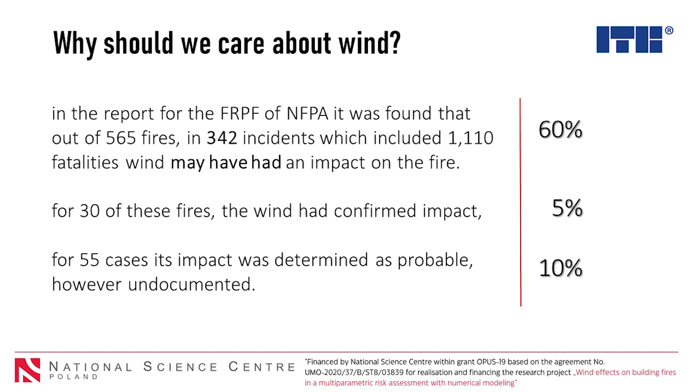So I see it as an important phenomenon, and I find a lot of joy in studying it. When you think about building fires, wind can interact with the building on its envelope, especially at the inlets and outlets - the points where the building meets the environment, the atmosphere. This is where wind can act as a source of force through pressures.

It can create very difficult to predict pressure patterns around the building. It can create pressure gradients between walls or roofs of the building. It can cause a very strong updraft force on the roof, meaning the wind is sucking the roof up with a force of even hundreds or thousands of pascals.

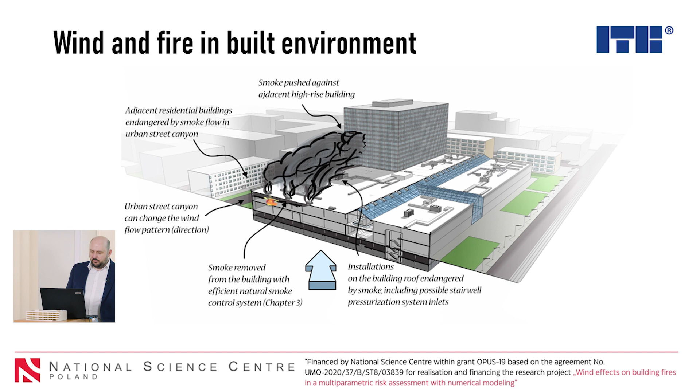Inspired by this plot, I tried to make one for fire following a similar fashion, and I put the phenomena that I find relevant to fires in here, placing building fires in the middle of the graph - scales from 1 to hundreds of meters, time from minutes to perhaps dozens of hours.

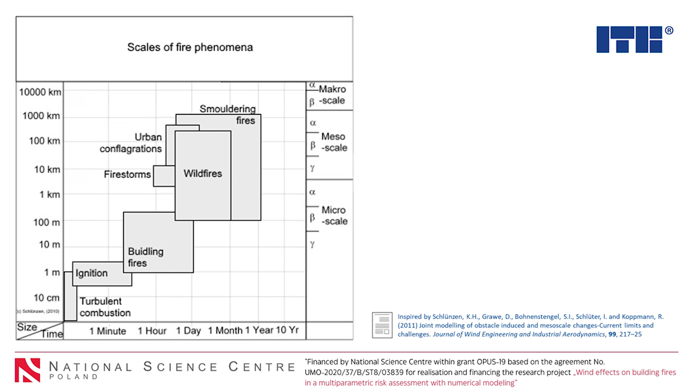This is the physical and time scales that we operate when working with fires in the built environment. This is pretty much the area where we operate as fire safety engineers. We don't go below, we don't really go above.

Of course, we do include some phenomena like turbulent combustion or ignition in our engineering assessment, but not through direct explicit modeling, but rather introduction of submodels and routines that help us introduce those conditions into the analysis we perform. The same happens for larger phenomena, the atmospheric boundary layer.

Stuff that in terms of wind happens at the scale of kilometers in the upper parts of the atmosphere impacts the bottom layer where the buildings are. We don't model that directly. It's pointless to model that directly in our CFDs. We have to find models that will allow us to put that in.

So here you can see a first challenge that emerges when one tries to merge wind engineering and fire science: they simply act at different scales. You have to find the place where those scales are the same, in which you carry your analysis. And for everything happening at a different scale, you have to figure out how to model that to get a reasonable outcome.

And boy, that was a significant part of this project, which you will hear about in the next presentations. So now let's try to summarize where we are. I will say we are capable of modeling wind, we are capable of modeling fire. That perhaps is a bit far a statement, and I guess many scientists would disagree that we are capable of modeling fire, but I think for engineering requirements, fire modeling is something we commonly perform, and it's nothing unexpected to do.

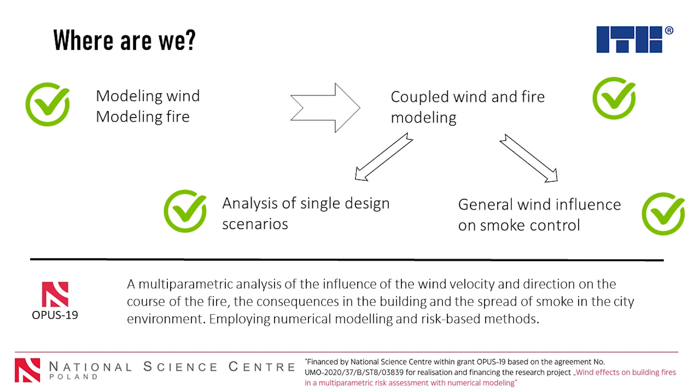Now, if we go a little deeper into that, where the challenge is: fire engineers, we like to simplify fires. We love the fire phases—growth, flashover, decay phase. We love to simplify fires. I often say that fire science is the science of complexity, and simplifying those complexities so we can use them in practice.

But this is simply a description of a fire that has happened, or a fire that may have never happened. It's just a single course of a fire. I like to view it as a more complicated phenomenon, something that begins, ignites, then perhaps spreads, grows. And based on how the course of the fire went, it creates damage or loss. It's not a single line on a plot, it's thousands of possible plots that you could have.

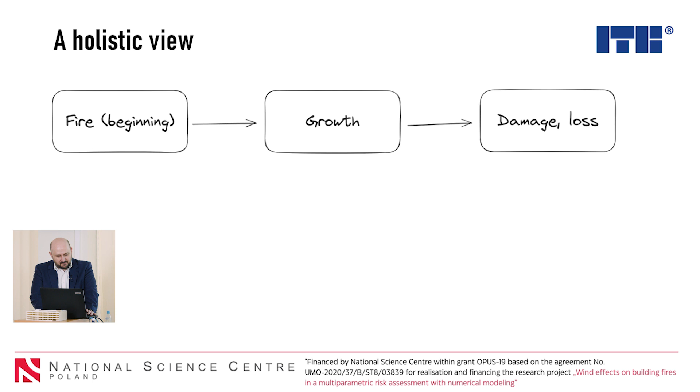Now, if you think about it, you put systems and wind into that equation, you end up with a significantly more complicated picture. Your systems in the building will affect the fire itself, the way it spreads, and how much damage it does. And wind will affect all of those above—it will affect the systems, it will affect the growth, it will also perhaps drive or prevent damage. So even though the graph is simple, it's a complicated mesh of interactions between those things, very nonlinear. But to make it worse, you cannot simply multiply fires by systems by wind.

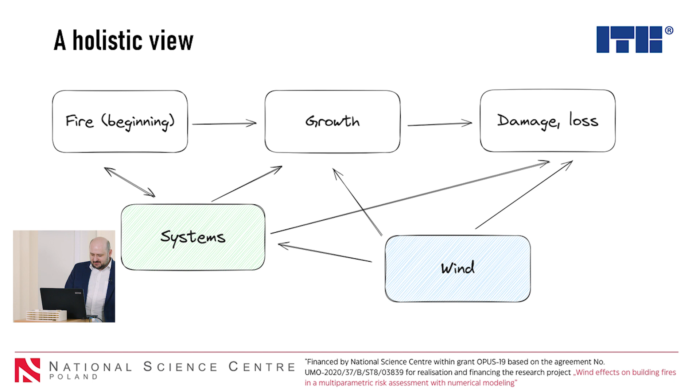These are complicated phenomena. In terms of fires, I like to think about fire as a collection of events that happen one after another. The fire has to ignite, then if it has the capability to spread to other objects, it will. If it doesn't, it will decay. If it has enough ventilation, it will be driven by fuel. If it doesn't have it, it will be driven by oxygen. It's a bunch of events that happen consequently one after another, very difficult to predict when they will happen.

Some people try to present this as an event tree analysis. I don't really like this method because it gives you false thinking that you can predict fires. You cannot. It's very difficult. I like to think about it as a collection of things that happen in progression.

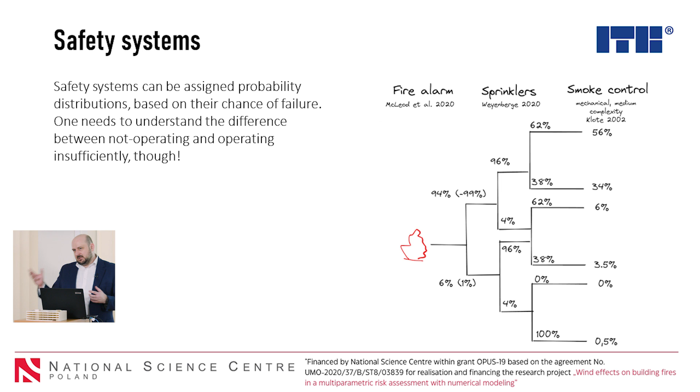If you think about safety systems, you can probably reduce them to probability distributions. You can put a number on the probability that a particular system will work in case of a fire. My student Bartosz, who did this analysis, noted that every single data source he found was older than him. A very difficult statement to work with, but that's the reality. It's very hard to get reliable data, just a very few sources that would give you new results. But we can simplify systems into some sort of probabilities, and it's also conditional probabilities. If my fire alarm doesn't work, then my smoke control will not work at all because it doesn't know there's fire. So we can sort it out.

There's also the element of chaos, the humans, which is very difficult to prescribe and will behave very differently from what we usually assume. A psychological thing is that most of the evacuation time will be defined in the pre-evacuation phase, for example. That's very difficult to engineer for.

So you have this complicated array, and then you have wind. Wind is something that constantly changes. Wind now will be different than wind in one hour from now. It's challenging to predict the wind. Of course, we can do it, it's meteorology. Predicting wind a few hundred years ago in the UK was a crime punished by death. Hopefully today it's just a science and modeling.

We can predict it, though it's difficult to predict what the wind will be on the day when the fire will happen, because I don't have any idea when the fire will happen. So we can narrow wind into a probability distribution. We can figure out from what direction and at what velocity the wind has blown and present it as an outcome for perhaps a whole calendar year. What are the possible wind directions and velocities?

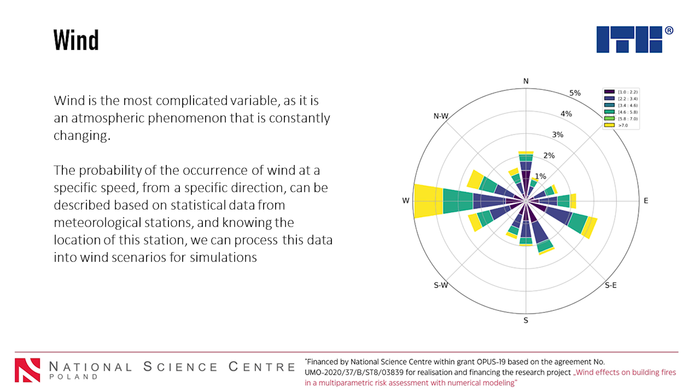However, when you start to interpret them, some of those velocities may be good for your system, some might be neutral, some may be bad. If the bad ones are the ones that are not very commonly present in your area, you have a good time, but it can be completely the opposite. It may be the most common winds that cause the most challenging outcomes for your fires. So you have to be very well aware of these consequences, and this is something we try to map in this project.

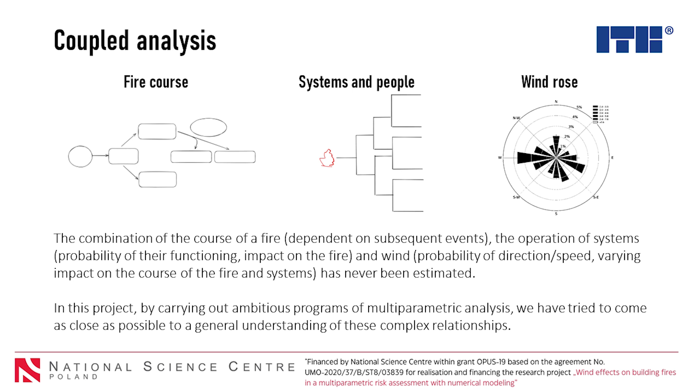How to do it? We try to couple all those things, the event trees that represent the fires, the probabilities related to systems and people, and the probabilities related to wind distribution, into one large package that tries to answer the large questions. What will be the effects of wind action for a large group of diverse assumptions? It's a very simple question, but you will not find an answer in the literature. There were no projects that would analyze hundreds of winds and fires and tell you that they end up in this distribution.

Because we're engineers, not just scientists, we always look to simplify those things to make them into useful tools for us. So that was another important part of the project, to narrow them down to something that we could use and hopefully share with you today and in the future.

We want to find ways to evaluate the results of those analyses, because we found that there are significant shortcomings in the methods of assessment that we normally use for CFD analysis, which perhaps need to be modified if we want to analyze those multiparametric analyses of wind and fires that go into hundreds of scenarios. We wanted to figure out if we can determine the fire and wind risk, so that risk can be the basis of how we design buildings.

And I think we found a way that you can actually do it quite well. There was this one question I had in the back of my head all the time: is there a safe wind? Is there a wind velocity that I can just ignore, that I don't care about? In some parts of literature you can find values like 2, 3, 5 meters per second, whatever. But is there a value where, if my wind is lower than that, I can just not touch it at all? It's a question we didn't really find an answer for, but at least I'll give you some hints on how it looks.

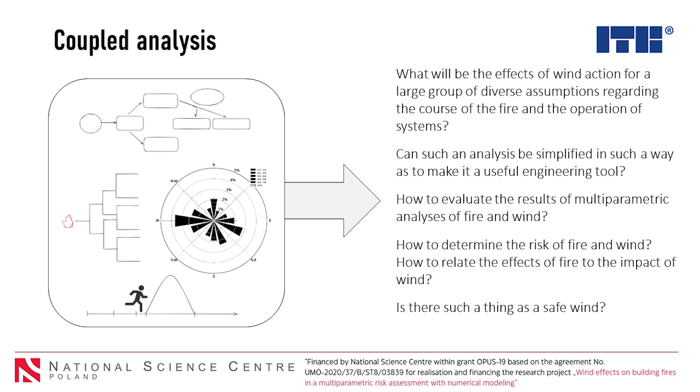In the course of these presentations today, you will see how we built up our project altogether. We've studied an open car park - I actually have one with me here today, a 3D model that we've printed out. We actually printed out the whole part of the city to study it. That's the case study we've chosen for this project.

We also investigated a small warehouse. You'll learn about the inputs, how we define the boundary and initial conditions for our simulations, and how we performed the CFD analysis in this project. Then at the end I will give you the outcomes: how did we proceed with investigating the results, how did we form conclusions, what those conclusions are, and what can we do with it in the future?

Not everything will be covered in the webinar, because it would have to be significantly longer if we wanted to cover everything, and I'm already taking 2 hours of your precious time. So we've narrowed it down to the most interesting bits. It's still a lot of stuff. We just finished the seminar in Polish and went 5 minutes over time, so it seems the package is well crafted for those 2 hours.

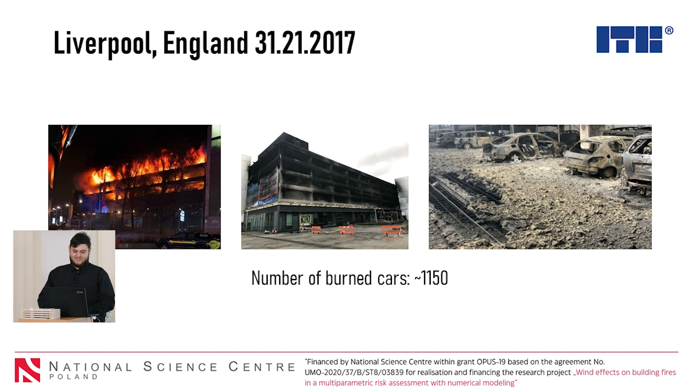Talking about how burdensome these fires are, I've prepared some examples for you. There is a 2017 fire in England - the King's Dock car park burned down, taking 1,150 cars with it. The year after, in New York, the King's Plaza Shopping Center car park also burned down, taking 120 cars with it. Also a year later, the Douglas Shopping Center in Ireland burned, and 60 cars burned with it.

Then another year later, we have the Stavanger airport car park with 300 cars burned, and the building basically collapsed on its own. So as you can see, these fires are happening every year.

Last autumn, we had the Luton Airport car park fire in England. That was the biggest car park fire ever, with 1,500 cars burned and the building basically unusable.

In Poland we also have a lot of open car parks. For example, here we have the car parks that are built next to the metro stations, so people can park their cars and travel the city by metro. There are a lot of these car parks in Warsaw, and I will talk about them later.

Now I want to tell you about the requirements for natural ventilation of these open car parks. In Poland, regulations state that the surface area of the vents must be at least 35% of the surface area of the wall on each level, and the distance between walls with openings must be a maximum of 100 meters.

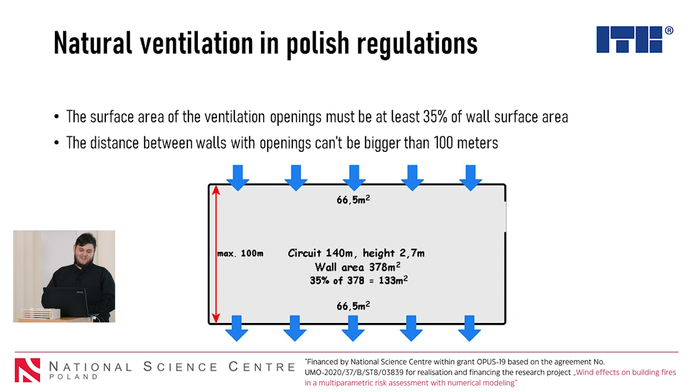The second most known regulations are from Approved Document B from the UK. They are quite different because they don't talk about wall surface area, but about the surface area of the level itself. So we have to provide a vent opening area equal to or bigger than 5% of the level floor area.

We also need to provide at least 1.25% of the floor surface area on each of two opposing walls, spread equally. So we can take two different routes with these requirements. The first is that we have the same car park, 50 by 20, so 1,000 meters squared. 5% of this is 50 meters squared, and we take it on two opposing walls, 25 meters each, meeting the requirements.

The other way we can do it is take 12.5 meters squared on one wall and 12.5 meters squared on the opposing wall, so we have the second criteria met. Then we can add the last 25 meters on a third wall, giving more access points for wind to reach the building. So now we have only one closed wall instead of two.

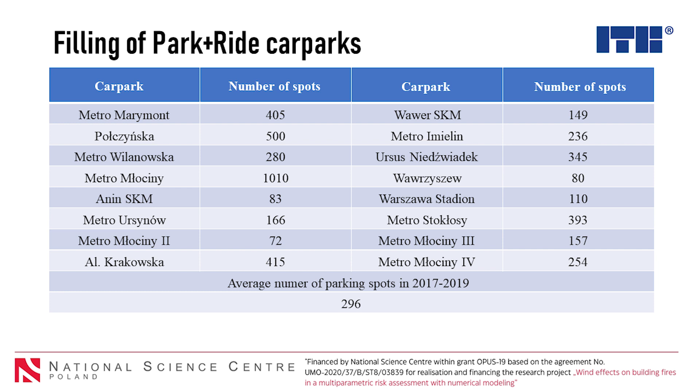With that data, we can calculate how likely it is that a single car will catch fire. Now, taking the filling of our park and ride car parks in Warsaw, there were 16 of them at the time of the project. We took the average number of parking spots in each car park and data about how filled they were at certain hours of the day, like 6, 10, 13, and 20.

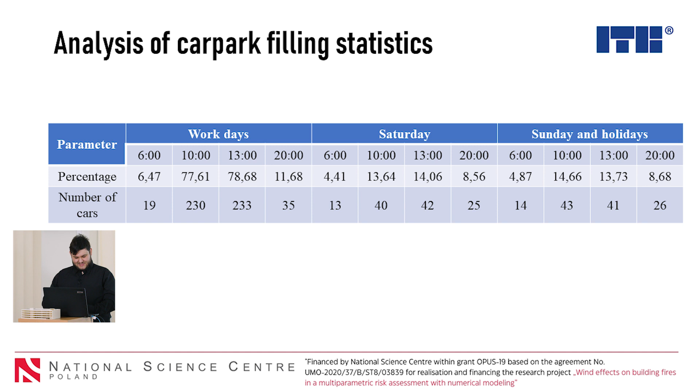We have it in percentages, with the number of cars that were expected to be in the car park at these hours. We have separate data for work days, Saturdays, and Sundays and holidays. When we combine all of it together - number of cars, number of fires, and number of available spaces, and expected number of cars in the spaces - we came up with the probability of fire occurring based on a single vehicle entering a car park. So we have the probability per visit, and the probability of a fire occurring in a car park with its current filling state.

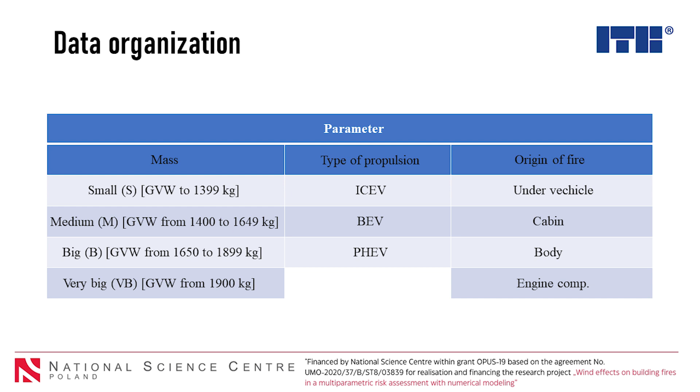So probably the method of putting a burner beneath the petrol tank or beneath the electric battery of a vehicle can change how the fire grows and the way the vehicle burns. We want to dig deeper into this data and try to get more information out of it, so we can come up with a better understanding of what is happening during these tests.

Another part is that we need heat release rates for our simulation. So we grouped the data, and now we have a lot of data in our base. We went with the 5th percentile of results for small cars, which is 1.4 megawatts. We went with the 50th percentile of results for small cars, which is 4 megawatts. We went with the 68th percentile of results for small cars, so we have 4.6 megawatts.

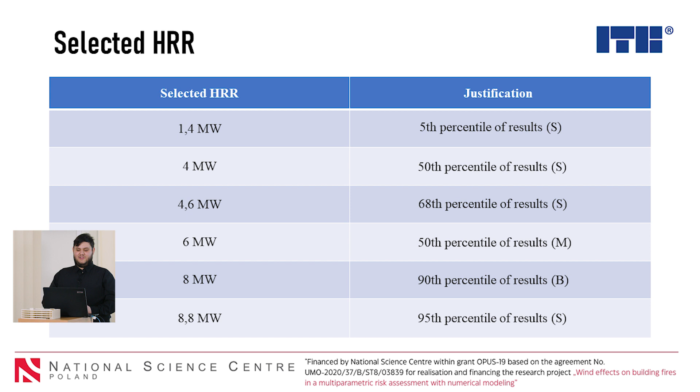So now that we know the probability and how big the fires should be in our simulations, we need to place them somewhere in our model. We decided the best location is the 4th floor of the car park, because that floor is most exposed to the wind effect, being above the nearby buildings, so the wind can easily reach this level.

When placing the fire on a parking spot on that level, we decided the best position would be the worst possible place. So we put it on the spot next to the entrance to the stairwell, which serves as the primary evacuation route for people and also the primary access point for firefighters to go and put out the fire.

So we now have the probability of fires, we have the designed fires we want to use, and we have the scenario to put them in. I will leave you with this, and now Dr. Grzegorz Krajewski will tell you about the evacuation from the garage and other elements used in the assessment.

Good afternoon. I would like to tell you a few words about the egress from car parks and other fire outcomes used in risk assessment.

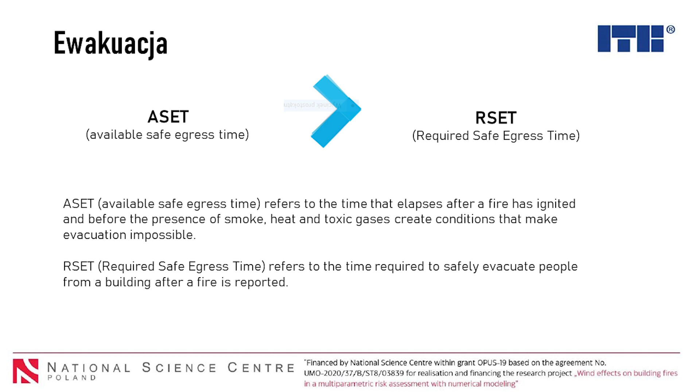How do we assess the available safe egress time? We have to define critical parameters of the environment during the fire, divided into the evacuation time and the time for fire safety brigades. During the evacuation time, we compare parameters such as temperature, smoke, and radiation.

The temperature of the hot gases layer shouldn't be higher than 200 Celsius degrees, and the temperature at a height of 1.8 meters shouldn't be higher than 60 Celsius degrees. About the smoke, the density shouldn't be bigger than 0.1 grams per cubic meter, giving visibility of around 10 meters. And the radiation shouldn't be bigger than 2.5 kilowatts per square meter toward the floor. This kind of radiation is safe for people during evacuation time.

The second part is the critical parameters of the environment during fire brigade activities. Here the temperature can be higher, measured at a level of 1.5 meters from the floor, and it can be around 120 Celsius degrees because firefighters have different clothing and different breathing apparatus. The radiation can be bigger too; it can be even 15 kilowatts per square meter at a distance of 5 meters from the fire, and 5 kilowatts per square meter at a distance of 15 meters from the fire.

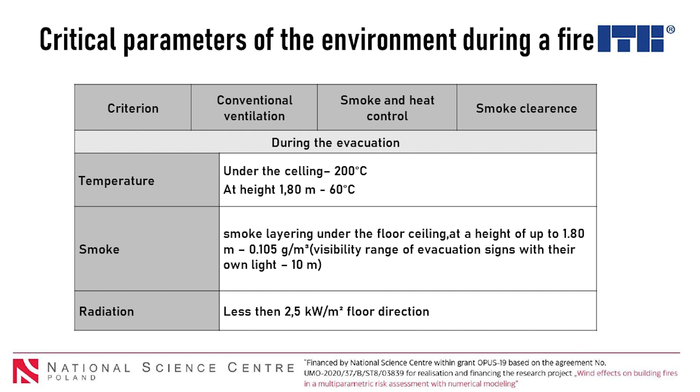When we start the calculation of evacuation and compare both times, you can see that the evacuation time in the car park with cars and without cars is more or less the same - only 3 seconds of difference. We have to remember that in car parks we have a huge area and a simple way of evacuation, so the time of evacuation is not such a big problem.

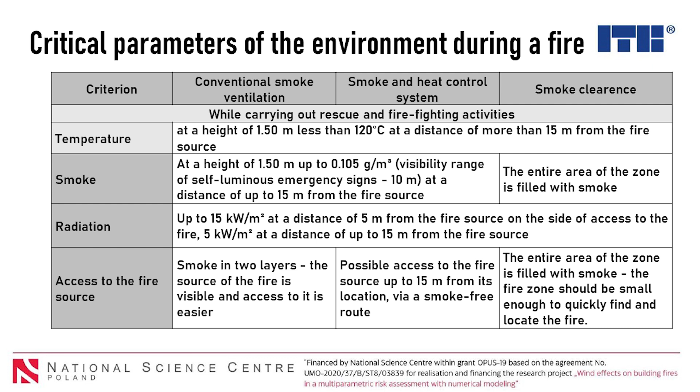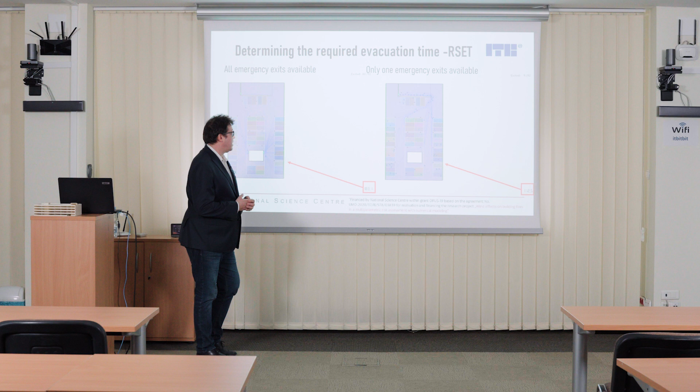If we compare these two simulations, in the one on the right all people have to go to the third door, so there can be queues and the evacuation time is longer - as in the situation, for example, in the office area or in the auditorium area.

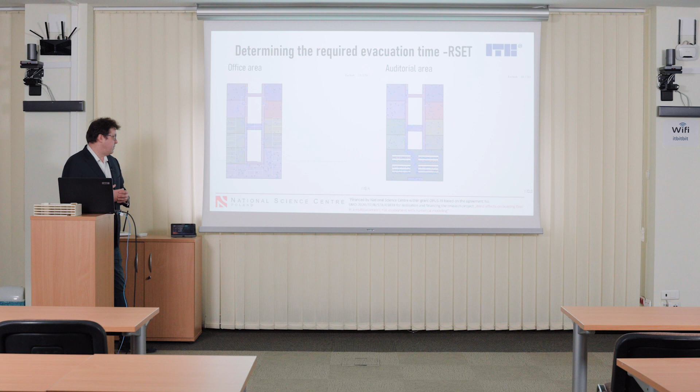There we can also have some influence of wind on the building facade. But if we compare these simulations with the car park simulation, we find a similar situation - when there is a lack of doors in that area, we find queues which increase the evacuation time. The same situation occurs in the office area with an open space and small offices.

On the other side, in the auditorium area, people are standing in a queue to get out from that area where there is a fire.

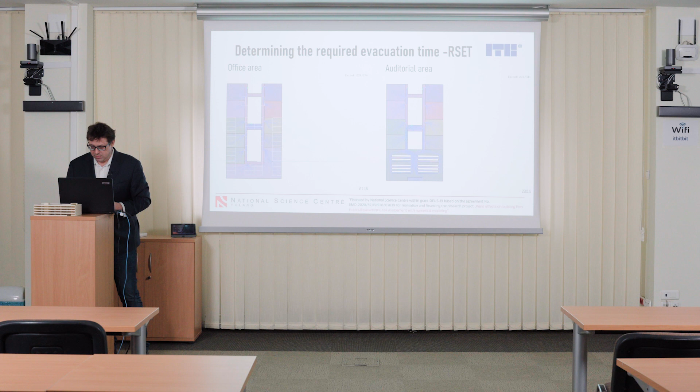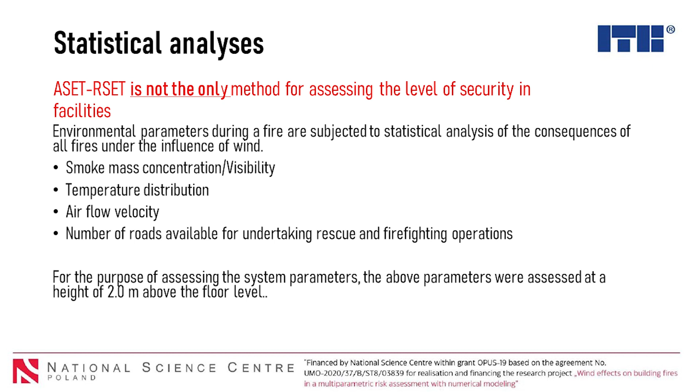So this is the first way of analyzing the system, if it is safe or not, and what we would like to present is what was done in that project. These are the statistical analyses. So not only ASET and RSET are the only methods to analyze the safety of the system, but what we proposed is to combine four variables to compare smoke concentration (visibility), temperature, flow velocity in the cross section of the car park, and number of roads available for fire brigades. If we take these four variables and compare them, we should receive an answer how the system works and what is the risk, if the system is working properly or not. And how we did it.

First of all, the first step is smoke mass concentration and visibility. We defined that our acceptance concentration is 0.08 grams per cubic meter, and if the car park is filled in less than 30% of its area, the system is working properly and it's good. Between 30 and 60% of the area, the effectiveness is average. If more than 60% of the car park is filled with smoke with density bigger than 0.08 grams per cubic meter, the system is not working and it's not acceptable.

Another parameter is average temperature at the height of 2 meters above the floor. If the average temperature is less than 100 Celsius degrees, the system is good. If between 100 and 120 Celsius degrees, it's acceptable. But if the average temperature at that level is higher than 120 Celsius degrees, the system is bad and the situation is unacceptable.

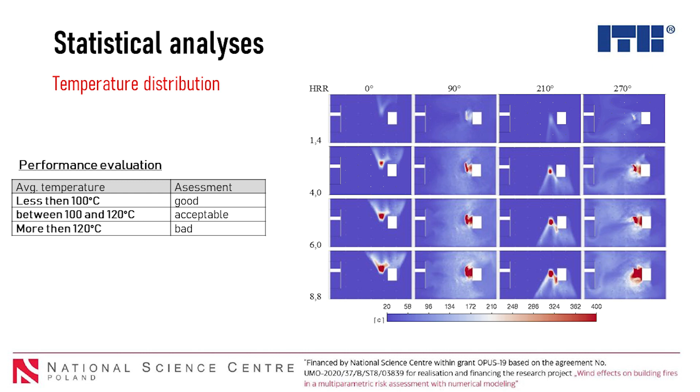The third variable is the average velocity in a cross section. We have three ranges of velocity at that level. If average velocity is less than 0.9 meters per second, the situation is unacceptable because the velocity is too low to push the smoke outside the car park. The acceptable flow velocity is between 0.9 to 3 meters per second, and if it is more than 3 meters per second, it's too much because of the risk of increasing the heat release rate of the fire.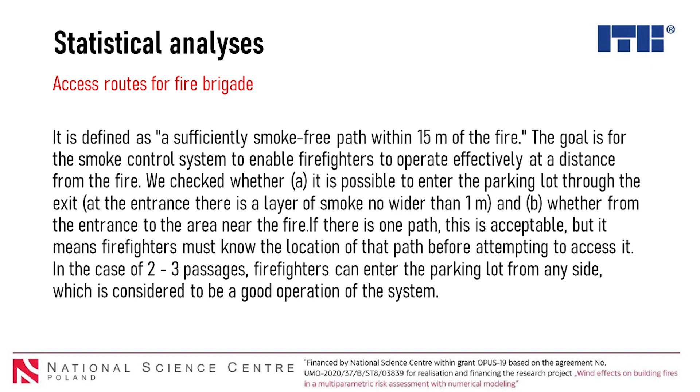And the fourth variable is the access routes for fire brigade. It is defined by verifying how many ways we have free of smoke and temperature, which allows firefighters to come and extinguish the fire. So if we have a situation where there are three ways possible for fire brigades, the system is working very good. If there is only one way, it's acceptable. If there are no ways for fire brigades, the system is unacceptable.

So summarizing all these variables, we can define something like an operational uptime, defined as a percentage of how many days during one year the system is working properly, and it's a sum of all these variables: the smoke concentration, the velocity, temperature, the amount of routes for fire brigades, and of course the external influence of the wind on the car park.

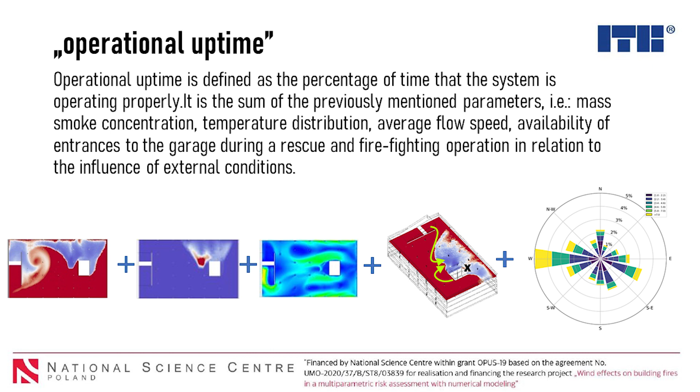So, for another part of this presentation, I will give the stage to Paulina Jamińska, because she will present the part about the CFD calculation with fire in a car park. Okay, thank you, Grzegorz. Thank you very much.

So a word of explanation on the evacuation studies performed in this project. When we submitted the grant, the first idea was to carry analysis for more office-like buildings, conference centers, and so on. So we could end up with life safety being the primarily assessed variable in the system, which would allow us to draw beautiful FN curves and so on. But eventually it became apparent we need to do an open car park.

It's just such a perfect topic for a wind and fire grant. And in the car park, the threat to the occupants is not really that high, as Grzegorz shown. It depends mainly on the pre-evacuation time distributions. However, if the same methodology was applied to a different building, this ASET calculation would be a tremendously different value. And this is why we wanted to share this here. And the other things, the statistical approaches, those levels and thresholds that Grzegorz shown, will become important when I give my final presentation, because then I will put that into use.

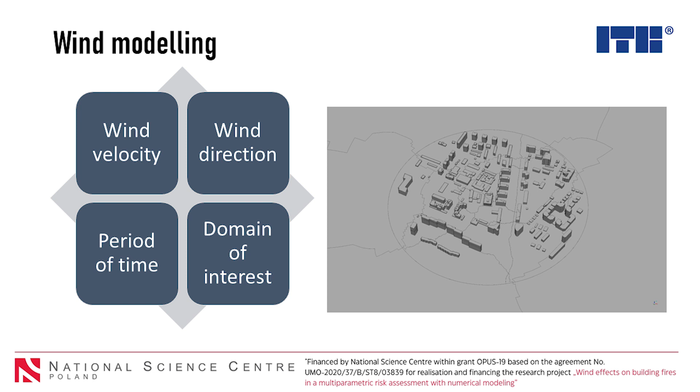In our case, when we want to take the wind velocity, the first thing is to reach for the Eurocode, where we can find some basic wind velocity values. But of course, those basic values are quite high. For Poland, our 3 wind zones, we have values from 22 to 26 meters per second.

But of course, those values are only basic characteristic values, and if we want to take into account mean velocity, we have to modify those fundamental basic wind velocities with the change in height, and of course with the effects of terrain roughness and orography.

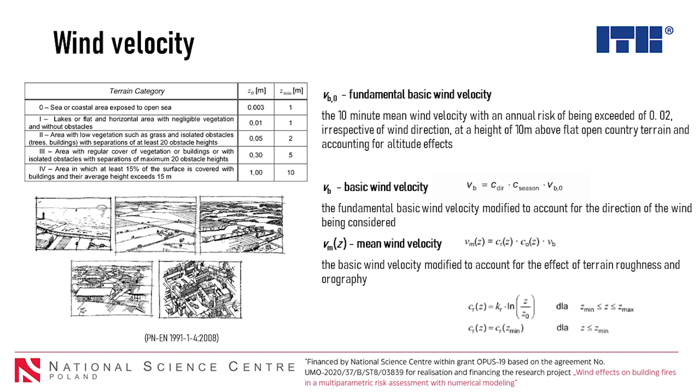And if we do that, we have to check what kind of terrain we have. We have 5 different terrain categories, and then we can choose one of those values. In our case, we decided to perform our calculations for the 4th category. This is like the city center with high buildings.

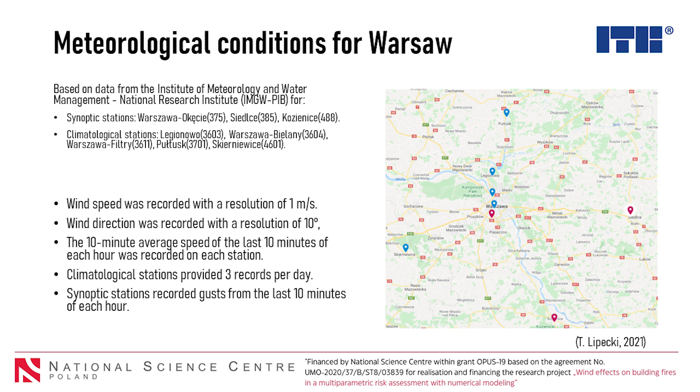Taking this whole data, we made 9 groups of wind velocities, but we will only focus on 3 of them. So we have the velocities 3 meters, 5 and 7 meters per second. This is the prevalent value for all the cases where the mean value is 3 meters per second.

And we of course have to choose the wind direction, and those directions were put into wind sectors, 12 wind sectors. For those 3 wind velocities, and of course one smaller, 1 meter per second, the probability of occurrence of a given wind speed was calculated as the total number of records in the considered measurement period.

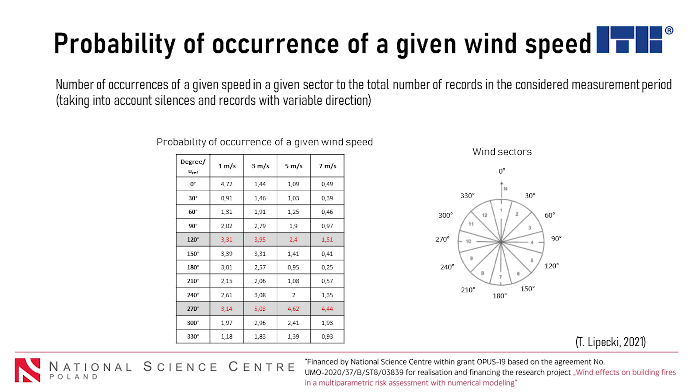We have the occurrences of all the given speeds, and because of that we could make the analysis based on some real data with probabilities.

The next step we did during the simulation was to choose the area we were interested in. So we chose a city environment in Warsaw with building heights up to 48 meters, and the radius was 420 meters.

Here you can see all the buildings, and on the right there is a little part of it. In the middle you can see a little red building. This is the domain, and in the middle is our main building of interest.

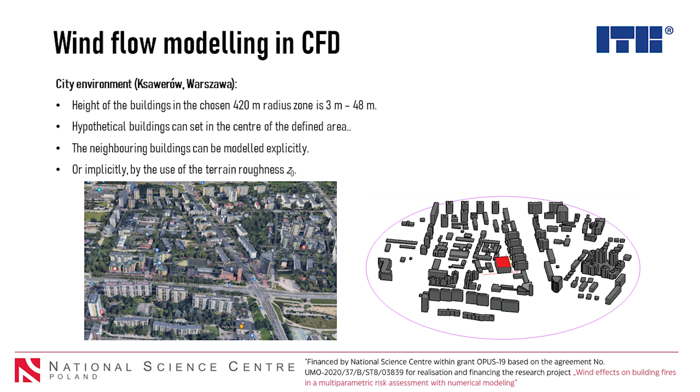So the next step is to bring this real model into the computational domain. We have to take into consideration that this domain has to be built in a way that will not create any blockage. And therefore, the domain was quite huge.

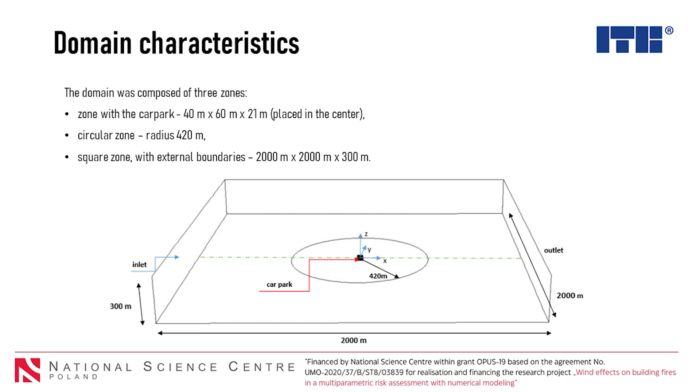We had some values here on the graph that show how many heights of the highest building have to be maintained to have no blockage in the domain. And this is the real domain I've created, and it consisted of 3 zones. In the middle, there is a zone with the car park, and in this zone we can put various different buildings. There is a circular zone that will have all the explicitly modeled buildings, and the rest is the square zone with the external boundaries.

Of course, the next step was to create the mesh, and I used the surface grid extrusion technique by van Hooff and Blocken, because this is the technique that ensures the wind flow is not disturbed by any mesh. It's a hexahedral mesh mainly in the whole domain, and the car park or the buildings in this little subdomain in the middle are built with tetrahedral cells because of the level of detail that is needed.

And here you can see how this mesh looks like. On the left, with all the buildings, you can see that those buildings were extruded from the ground. And actually, all of those buildings are a little simplified because of this extrusion technique. We had to choose what level of detail we have to maintain.

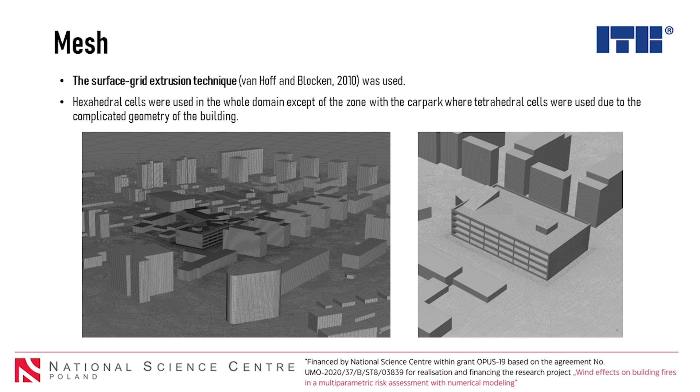And of course, all of the simulations have to be validated and verified. So we can validate our model, CFD model, with the wind speed distribution and mean wind speed values with the experimental data. And this is the model that was scaled to 1 to 200, and we cannot scale down the fire. So therefore, we can only check the wind profile and average wind statistics in this validation.

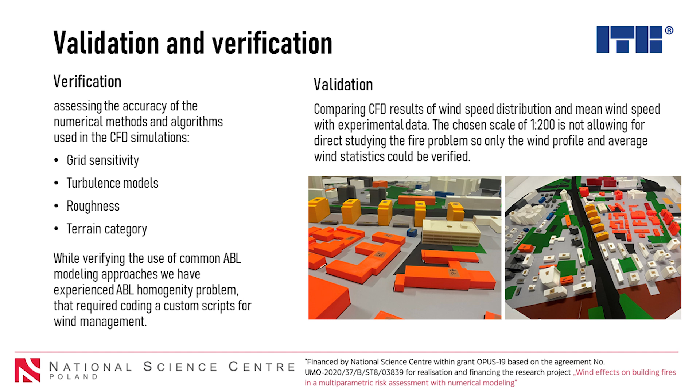And of course, I've done the verification of the CFD model with the grid sensitivity, and turbulence models were also checked. And there were some discrepancies in the results because there was a problem with atmospheric boundary layer speed up at the bottom of the domain. So this is the ABL homogeneity problem.

And in our approach, I was able to use a modified wall function, which was based on the aerodynamic roughness Z0. And this was used instead of equivalent sand grain roughness, which is used usually in the standard wall function. This allowed us to have no speed up in the wind profile, no change between the inlet profile and incident profile. And also the application of driving shear stress was set at the top boundary of the domain to also maintain the same profile as at the inlet.

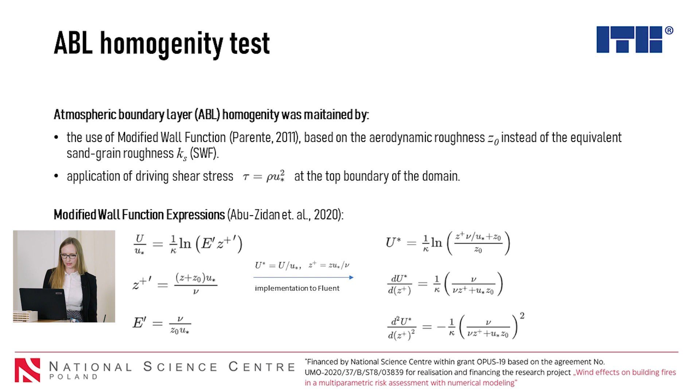So here are the results from my ABL homogeneity test. On the left, there is a standard wall function. On the right, modified wall functions. So for the standard wall function, we can see how the wind profile changed along the length of the domain, and it can be seen on the bottom image.

And we were able to get very good values of similarity between the incident and inlet profiles for the wind velocity and kinetic turbulent energy, and also the dissipation of the kinetic turbulence energy.

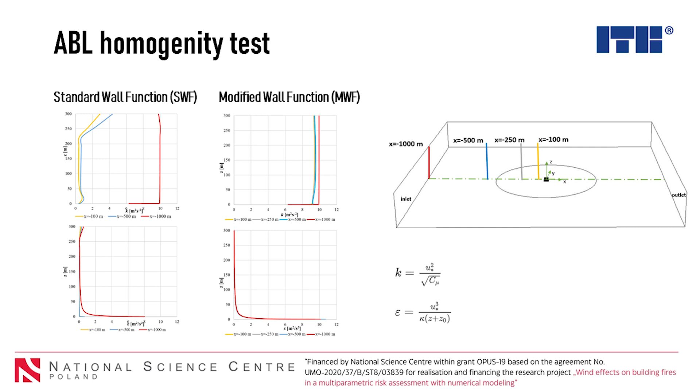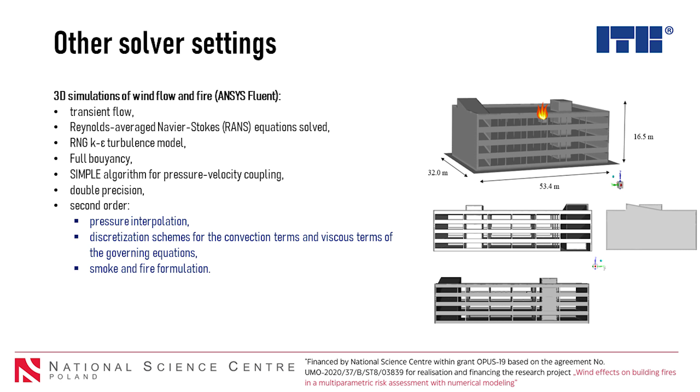So after doing the ABL test, I was able to put a fire in my domain, but of course it wasn't a literal fire, and I had to simulate it as a volumetric source of heat and mass, and no chemical reactions were actually modeled. But the heat transfer was, of course, applied in the model. And the simulations were, of course, done as a transient flow with the RANS equations and RNG turbulence model.

I would like to summarize how this was done, because maybe it will be easier to get a grip about this. At the beginning, it was the geometry import, with the whole domain and the explicitly made buildings. Then was meshing, building the case in Fluent, assigning the interfaces, and making the ABL new wall functions definition. And then I could go to the next step, CFD calculations.

Those were repeat steps, because we had different cases with different wind speed and wind direction, and those calculations also had the fire in them, and they were done for different heat release rates.

And in the post-processing, you have seen some of the data. We can take the temperature, smoke, velocity, statistics, and see all the important things as data or as images.

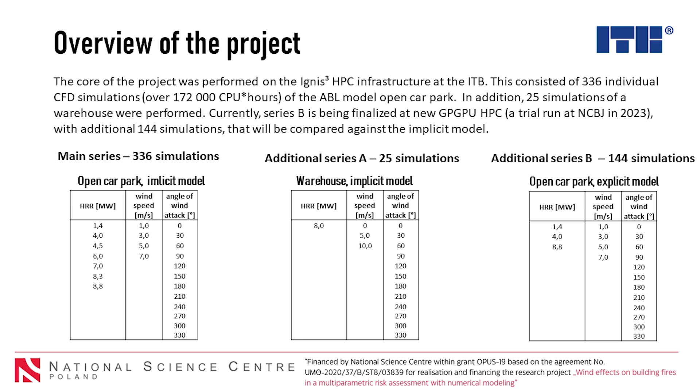Here are some results of the wind distribution, wind speed distribution inside our open garage. You can obviously see that for the angle of wind attack equal to 0, the wind goes through the building, and the velocity inside is higher with the higher velocity at the inlet. But for 90 degrees, where we have a wall facing the incident flow, there is a stagnation point observed, and it's there even at the highest velocities of 7 meters per second.

When we look at the visibility of smoke inside the car park, on the left for 0 degrees, there are near perfect outcomes for all the fires because the smoke is blown out from the car park. For 90 degrees, the smoke accumulates and doesn't leave the car park. This can be seen for all of the heat release rates, but most significantly for the highest one.

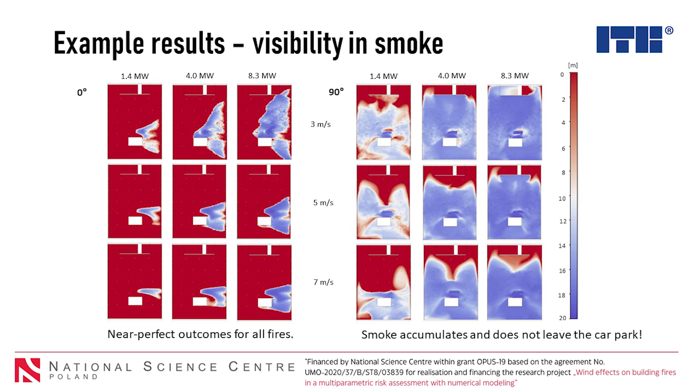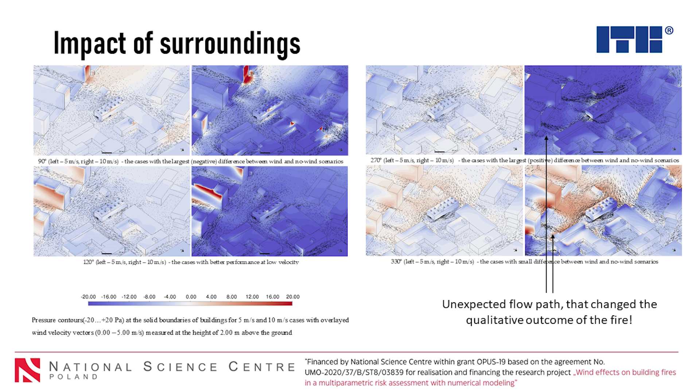Of course, we modeled the surroundings of the building to check how they will impact the flow inside our car park or other buildings. In this case, you can see how there is an unexpected flow path on the right, on the bottom picture, where the flow changes, and it will influence the outcome of how the fire will behave inside the building.

This is the building of the warehouse, and this is how the wind behaves inside. We can see the vortices inside the building, and even a small change of the wind angle can change how this wind will behave inside the building. Similar results for the car park, and those velocities inside the building may also help assist the evaluation of conditions.

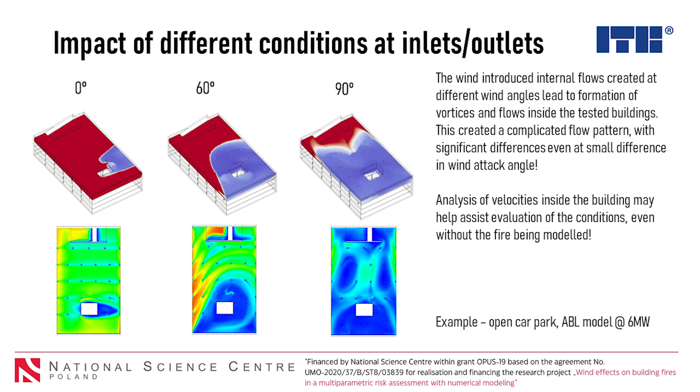Of course, we can think that even without the fire, we can take some knowledge from this simulation and make some assumptions. Thank you for the attention.

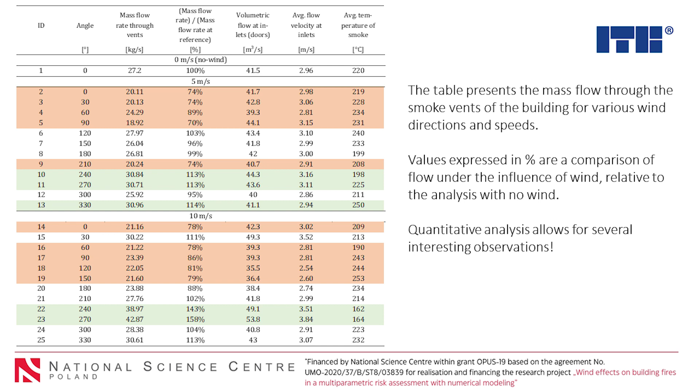So we have the worst case scenario that occurred not at the highest wind velocity, but actually at 5 meters per second, 70%, the biggest reduction in the performance of smoke control ventilators out there. We wondered why, because it seems obvious that it should be at the highest velocity that would worry you most. That's our current paradigm in design: larger wind velocity, worse performance. So why did it happen at the lower velocity?

The explanation comes from investigating the flow patterns around the building. At low velocity, 5 meters per second, the flows happen such that the building is quite well isolated from the wind, so there's almost no wind flow around it, very stagnant in that location. However, if wind speed increases to 10 meters per second, we suddenly find flows happening around the building that eventually hit the openings, and through those openings they influence the performance of the smoke control ventilator. So it's not just the velocity, not just the direction of the wind, but the particular outline of the flow path in the vicinity of the building that dictates ventilator performance.

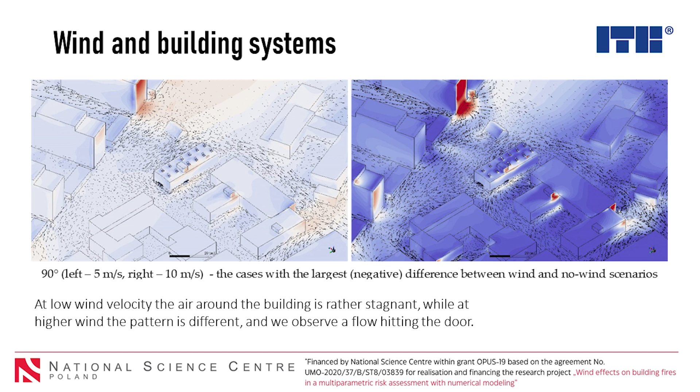A very interesting observation, and if we hadn't done that, I wouldn't have believed it could actually be worse at low velocity. It's obviously not always like that. In many cases, at larger velocities we had different outcomes than at lower ones, so it's difficult to say which would be the worst one.

Another interesting observation: there are two cases here, 240 and 270 degrees, with 143% and 158% of the performance of the natural ventilators in the building, they're turbocharged in this scenario. At first I thought it was a mistake, that they couldn't perform that well, that in wind conditions they should be worse than the reference case. But here they're not just better, they're considerably better, almost half better than the normal vents. Comparing these to scenarios at low velocity, those don't show such performance, so we wondered what made this performance possible.

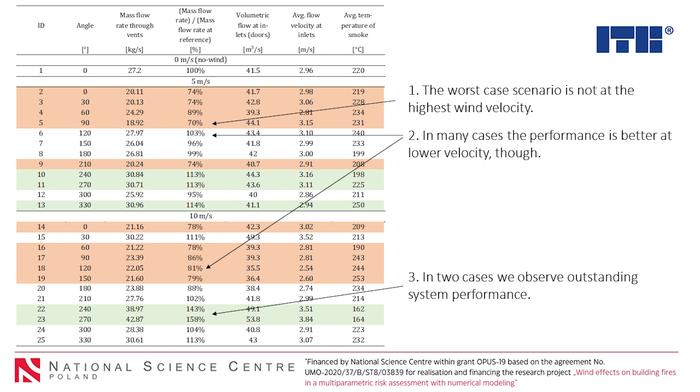And there actually is an answer to that. If you look at the flow path again, we have wind flowing through our domain, and it flows around the buildings that are quite tall nearby the warehouse we're modeling.

And there's a building in here. This wind pattern hits this building, bounces off this wall, and goes directly to the inlet of our building. At large wind velocity, it's like a supercharged jet hitting directly into the makeup air provision for the building, making literally a flooding system for the warehouse, pushing out the smoke with extreme capacity. A very interesting outcome. And if we were just analyzing the building without the surrounding buildings, without the terrain, without anything around it, we would never find out this particular outcome.

It's very interesting, and it shows that even if we try to simplify our modeling through implementation of ABL models, which are much cheaper to run and much easier to run and give you quite good rough outcomes, these specific things can happen in your locations, and you should be at least aware of the particular wind field that you're dealing with in your vicinity.

The next thing that wind significantly impacts is the external plumes. So again, we have investigated the shapes and sizes of the external plumes by putting an isosurface on them. We had plumes that were near perfect, very nice thermal buoyant plumes that simply flew away from the fire. We had plumes that were quite complicated and were accumulating behind buildings - I'll discuss this a little bit more. And we had specific wind directions in which the plume did not go upwards, but went down, like in the experiment that I've shown at the beginning of the previous presentation.

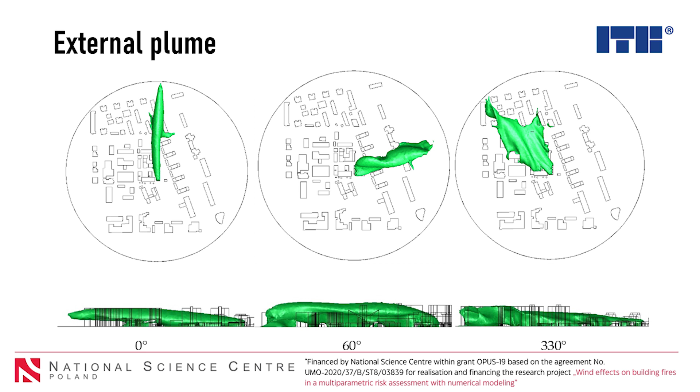So we have the smoke spreading across the floor of our model, actually in the vicinity of buildings. If you look at the smoke concentrations, it looks quite dangerous because the courtyard of this building, which is 50 meters away from the fire, has actually larger smoke concentrations than the surroundings of this building. It's quite challenging.

This tool, this approach, analyzing the near field of the building model that you're analyzing in wind and fire coupled modeling, allows us to make interesting observations like that.

Another one that's interesting - we have a city model down here in the office, and I went for my tall building that was nearby. Actually, it's that building that I'm holding. Anyway, the interesting thing with tall buildings is that if you hit them with wind from one direction, there will form a vortex behind the building. Like there will be two vortices that are forming behind this building, like a shade behind it.

And what's interesting about this shade is that if there's a smoke plume coming in this direction and the smoke enters this shade, these vortices that are behind the building, it can be quite efficiently trapped in that location with no possibility to be extracted from there. And this means that even at a large distance from the fire, you can actually observe significantly higher smoke concentrations than in the buildings that are nearby because of those aerodynamic effects. Another good reason why we should study wind engineering when we're doing fire engineering. Those things are not obvious. Wind is a complex phenomenon and we should treat it like that.

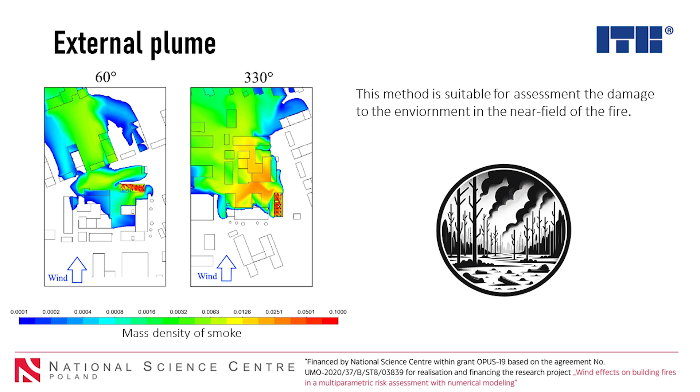The next step, as I said, warehouse is where we started. That was already a lot of findings, but here we go to the proper analysis, the car park. Like Paulina previously mentioned, we have flows in the car park that determine where the smoke spreads in the car park. When you start looking at those pictures, you start to see patterns.

If the smoke goes left to right in my car park, my fire is here, I have a triangle shape, which you would expect blowing on the fire. If I have almost no velocity in the car park, this is the stagnant case where the wind is coming from the bottom and blocks everything inside, the whole car park is smoke logged. If I have large vortices forming inside the car park, I have shapes that resemble those vortices in my plots of the smoke in the car park.

Actually, I would even say that to tell you what would be the outcome of a fire in this car park, I probably wouldn't even need this picture. Based on the hundreds of CFDs that we've made, observing the patterns of velocity and how those translate into the patterns of smoke distribution inside the building, this is pretty much what you need to define the performance, most of them.

Maybe not perfectly, but it should be enough. So it gave us this interesting idea that perhaps you should just run multiple analyses for the wind field, for the velocity themselves, no fire in the car park, analyze those, and based on those simulations, pick 2 or 3 scenarios that you really need to simulate with the fire inside. This could be a very clever trick to really reduce the number of CFD analyses you need to perform. The wind analysis, when there is no fire inside, would be significantly cheaper than the analysis with the fire inside. Significantly, 10 times cheaper for us.

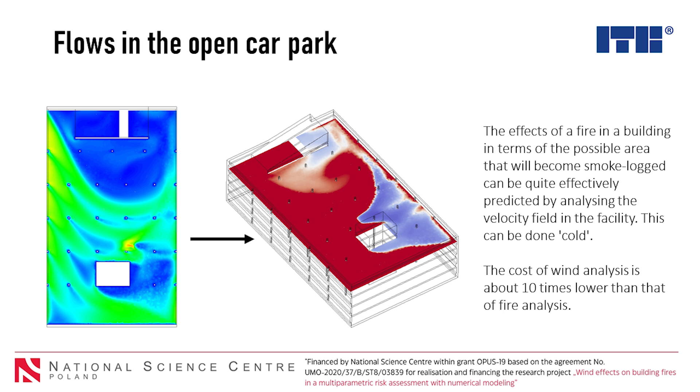Another thing, the temperature field.

I'm receiving your difficult questions. Good, a lot of good questions. I appreciate that. Keep sending them my way.

Another thing, the flows and the temperatures. Here, as before, the wind patterns, the flow patterns will define how much of the heat is removed from the building. This is a smoke and heat extraction system, so heat is being extracted, and in some cases it's not. When the car park is blocked by the wind and there is a stagnant flow field inside, you can see the heat accumulating in the car park, having a much bigger area than when the fire is ventilated very well.

You can actually analyze this much better when you compare the same fire but different ventilation rates. You can see that at 1 meter per second, this is a 9 megawatt fire. At 1 meter per second, this is not enough. The fire is clogging the car park, while when you increase this to 5, 7 meters per second, you clearly have a car park empty from smoke, a very well ventilated space.

And when your car park is blocked, actually the low velocity is better because the smoke can escape the car park easier, while with the high velocity, it's blocked more, so it's more entrapped in the car park. Different outcomes at different velocities, the same fire, the same car park.

Based on this analysis, we can technically determine the area at which the fire may spread or damage surrounding vehicles. With this knowledge, we can try to map the risk of damage to the goods stored in the car park, meaning the vehicles around.

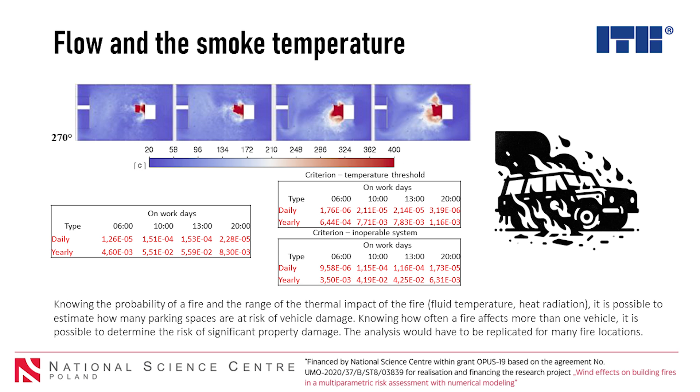Another thing that we have investigated, and I think this is some sort of novelty here, is the access for firefighters. This is very important for me. We need to understand if firefighters can enter the building, and it's not just the number of entrances. If they have all entrances available, like in this case, they can approach from 3 different ways. That's the most perfect solution, wherever they go they will find the fire. If they can approach from 2 ways, I still find this a very good approach, a good possibility for firefighters.

However, if they only have one pathway, this means they can pick a wrong one when they arrive at the scene, and in consequence delay the effective water extinguishing action, which will mean that we will deal with a larger fire with more severe consequences.

If there are no entrances to the car parks available for the firefighters, they will not be able to perform their actions, and they will be limited to acting from outside of the car park, which we know is not often very good when the fire is deep inside.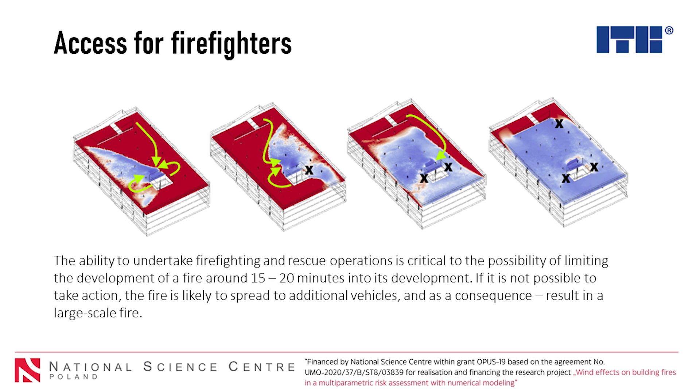So we took a lot of effort to actually determine if they can access the car park or not for all the scenarios that we have investigated. And now we come to an attempt on how to assess this at large. So we have done 330 simulations for those car parks.

How do we process the data all together so it makes sense? So instead of producing a book having 1,000 pictures, I can have one nice clean plot that tells you how good or bad is the car park. And this is a place where everything we said so far comes together.

So we are analyzing the visibility, temperature, velocities, firefighter access in relation to the probability of wind, and trying to assign when does the car park work or not.

First, we assess the visibility. This is an estimation of how big a part of the car park is flooded by the smoke. So we've put our threshold values, 30–60%.

These are numbers that we just came up with. We don't have, that's just an idea, whatever the number is. We assume that if the car park is filled just 30% by the smoke, then the outcome is quite good. If it's filled 60%, it's not great, but also not horrible. And if it's more than 60% filled, it means that most of the car park is filled with smoke, and this is an unacceptable outcome of the simulation for us.

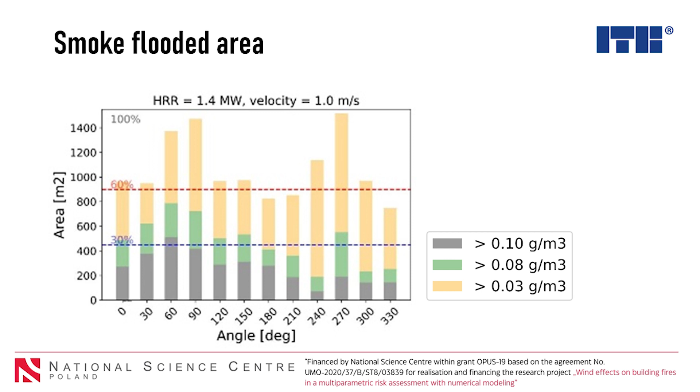So once you can apply this statistical method to a single case, you can apply it to any amount of cases that you want. And finally, we are capable of investigating the outcomes of multiple hundreds of CFD simulations altogether. And we start seeing some patterns emerging that you would not see if you only looked at individual cases.

So if we look at the smoke flooded area for a 1.4 megawatt fire, for low wind velocities around 1 meter per second, in almost none of the cases the system works. Most of them, the car park is fully filled with smoke.

At 3 meters per second, we have some cases in which the performance is not that bad, but most of them are still bad. And at the largest velocities, we see a lot of points where you have very good performance, mostly, and some points where the performance is very bad.

With this data reduction, we're capable of investigating hundreds of CFDs and quickly telling which cases are worse, which cases are best, and what is the quantitative difference between them. That's for the smoke flooded area, the visibility.

Next one, temperature. Temperature is difficult because the difference between the different fires will be larger than the differences between different winds. So you cannot compare the 1 megawatt fire to an 8 megawatt fire. These are completely different stories.

But you can compare them within a group of designed fires. And here we also assume that there must be a temperature at which we are comfortable, which was the average temperature below 100. There was a temperature at which we were unhappy with the car park, which was above 120. And there was some medium region between 100 and 120.

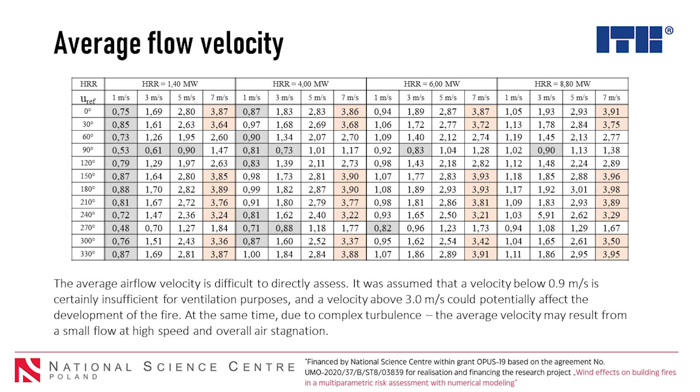So we also don't want too high velocity. So we've assigned those numbers to the criterion, and ended up with another matrix of good average and bad performance of the system. The last one, access for firefighters, again the same approach.

By the way, here we have one little problem. As you can see, the larger velocity easily meant that the access routes were better, but the velocities were above our threshold. So do we want to keep the velocity under control, or do we want more access routes? It's a challenging question, because we don't really model the impact on fire growth of the large velocity we put into the car park.

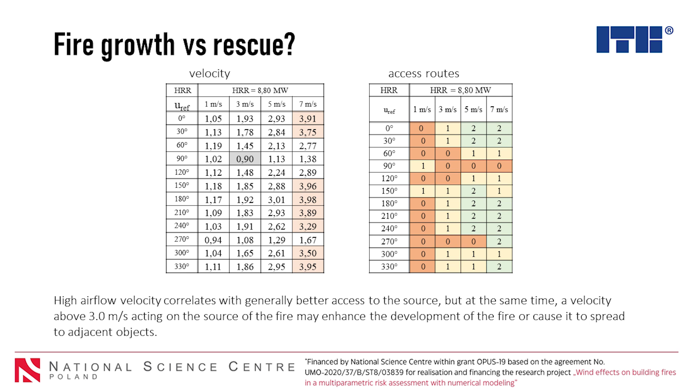Now, how to put probability into that? We came up with the concept of operational uptime index. We define it as the percentage of time in the course of a year in which the outcomes of the fire would be acceptable. Like, if we know that the western winds are 30%, the northern winds are 17%, the eastern winds are 7%, the wind velocity of 7 meters per second is this, and so on.

If we know the probability of wind over the course of the year, and we know the outcomes of all the fires that can happen in those winds, we can tell for how much percentage of the year the car park is ready to operate when there's a fire happening inside the car park.

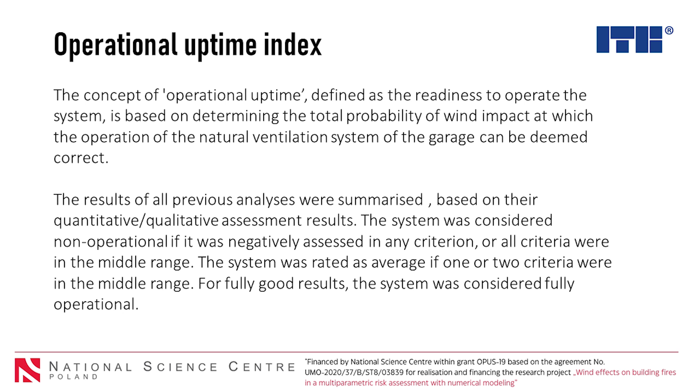So first, we've averaged all those outcomes of individual scenarios, of individual assessments of visibility, velocity, temperature, and firefighters' access, into this one major table showing the final index of operational, non-operational, and average.

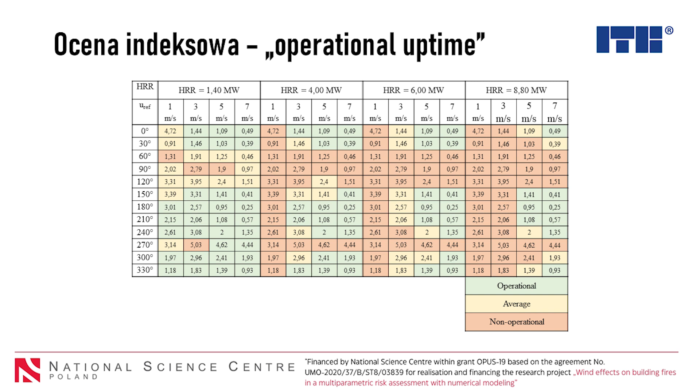Because now I know that if my heat release rate would be 1.4 megawatts, which is a small fire or an early growing fire—Bartosz showed that this is just the 5th percentile of all the fires that were tested in laboratories—I know that in these fires, for 86% of time, my car park is ready to operate, and it will operate efficiently if the fire happens there.

And in 11% of cases, it would be to some extent inoperable. If we increase the size of the fire to 4 megawatts, the number would be almost 40% for good operation and almost 60% for the bad one.

For the largest fires, 8.8 megawatts, that's the top percentile, the 95th percentile, we have 14% of cases in which the car park operates properly, and 83% of cases where, if the fire happened in those wind conditions with this heat release rate, the car park would not be assessed as working correctly.

This allows us to process hundreds of CFDs into a single index that you can tell to someone: hey, your car park works only in 15% of cases, that's not good, right? Or your car park seems to be working in 90% of fires that can happen in it. That sounds quite reasonable. This is a very nice outcome of a very long, painful, and complicated analysis.

Anyway, this is of course related to the direction of the winds, because the direction defines the probability of the winds happening. And if you think that I have in a way cheated my way by making this look the worst that I could, you are probably right to some extent.

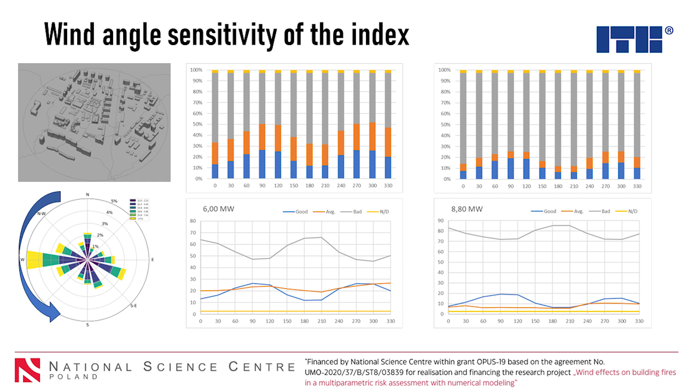We've carried this sensitivity study for all of the fires and came up with these distributions. I think that they are very interesting.

Finally, risk of extreme fire. Bartosz showed that the motivation for this study was extreme fires. We had cases of extreme fires happening, like in previous months. I have a feeling they happen every month. Like seriously, in the last 3 months we had 3 major car park fires. It's insane how often they happen, really insane. And we wanted to assess how often a fire can happen that could actually take down the building.

To assess that, we need some elements. First is the probability of fire, which Bartosz defined for us. The second is how many vehicles are there in the car park. If the car park is empty, there is no fuel to spread, so there will be no extreme fire in it. The third one is how big is the initial fire, because it will define the probability that the fire can spread before the firefighters arrive.

And can they actually arrive? Can they actually reach the fire when they arrive? That's another variable you need to account for. If you have a car park which the fire brigade cannot even enter, there's a probability that even if you start with a small fire, it will grow to a size where it could endanger the structure.

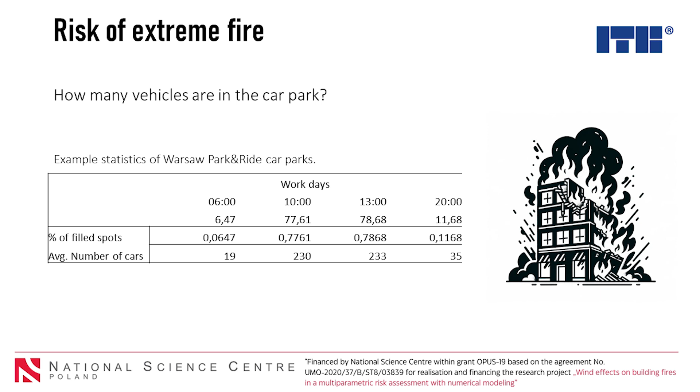So let's try to put some numbers into that. First, we know how many vehicles are in the car parks from the statistical analysis of Warsaw Park and Ride car parks. We know per day, work days, per weekends, at particular hours how filled the car parks are. So we have a number on how many vehicles are there.

We would love to know what's the distribution of real vehicle fires in the real world. I would love to know that there were 1,000 car park fires in the world and the distribution of the heat release rate of the initial vehicle was like that. It's simply not possible, we don't have that data. All we have is experiments carried out in laboratories, with the caveats Bartosz mentioned related to the location where the fire is ignited. However, based on that data, you can say that in 60% of those experiments, the fire was 4 megawatts or more. In 10%, it was more than 8 megawatts.

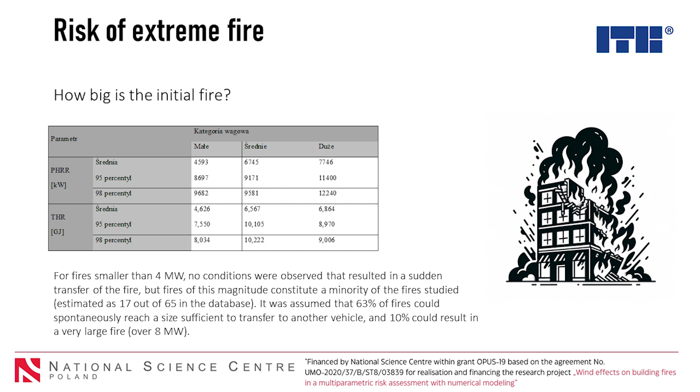You can put some numbers to specific scenarios, analyzing the table at large, and come up with probable fire sizes. Then, knowing the outcomes of the fire for each car park design fire size, which we carried out before, we can know the outcomes of that. Now the last one: can the fire department reach the fire?

First, they need to be notified, so we put in the probability that the fire alarm is working. The second is that the firefighters must access the building, and that's exactly what we've done in the risk analysis previously. So we have a number to say in how many cases they could access the floor, and in how many cases they could not, if the wind was taken into account.

Taking all of those together, we get a combined probability of fire annually in a car park that could perhaps endanger the car park of 3.2%. It sounds quite high, but in general the probability of a fire in car parks would be 1 in 20, 1 in 30 years. So the number is not that off from what I would have initially thought. I'm surprised that this is the catastrophic fire size, actually.

Anyway, this could probably be narrowed down if we included the location of the parking spots, the floor at which the cars are located, the weather, temperature, moisture. This will impact the growth of the fire, the vehicle size and age, the vehicle type. There are multiple variables we could add to this probability analysis to narrow down the risk of an extreme fire and come up with a number.

And then to get from this value to the risk, you need to know the value of the building. Just multiply it and you have your risk in terms of dollars. So that's how this complex methodology can be narrowed down to give you a single number, a single value of risk. And with risk, I'm an engineer, I can work with risk. I can work to reduce it, I can accept it, I can tell people we need changes. This is a variable that I feel fit to work with.

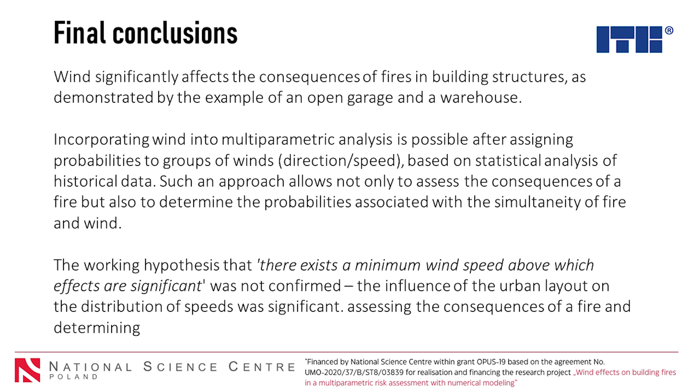We had a working hypothesis: there exists a minimum wind speed above which wind effects are significant. I don't think we confirmed that. I cannot confirm if their value exists and what it is. The local wind field caused by the buildings in the vicinity of the fire will make such a complex spatial arrangement of wind flows that it will not be possible to just define a threshold value.

We defined some very interesting qualitative and indexing methods to analyze the outputs of the analysis at large, which I think can be very useful for future analysis, and we will be definitely resorting to those in our future studies.

We also found out how to reduce the number of scenarios to be identified, because this is expensive. There's a reason why I'm doing this as a scientific project funded by the National Science Centre in Poland, not as an everyday commercial job. It's just too big to be a single job.

172,000 CPU hours. I'm not sure if you noted that number from Paulina's presentation, but that's the number of computer hours that we've used to run the calculations shown in here.

And lastly, CFD is a perfect method to assess the environmental damage caused by the fire in its vicinity. I really like this method. There's a chapter in Margaret McNamee's and Brian Meacham's handbook about environmental effects of fires and modeling them, where we go into details on that, and I think this is the method you should use.

Now, some sexy stuff. What should we do with this in the future? I have two future trends. One is I regret that we are unable to capture these feedbacks, between systems and growth, the wind and growth. We're simply unable to capture how the wind impacts the growth.

We still have a design fire scenario. I would love, and perhaps I'm inspired a bit by the traveling fire methodology, to invent or come up with some method that would allow us to build a growing fire where the growth of the fire would be the outcome of the analysis, not an assumption made before the analysis. I think it would be super interesting, and if we could couple that with the finite element model of the structure of the car park, that would be beautiful.

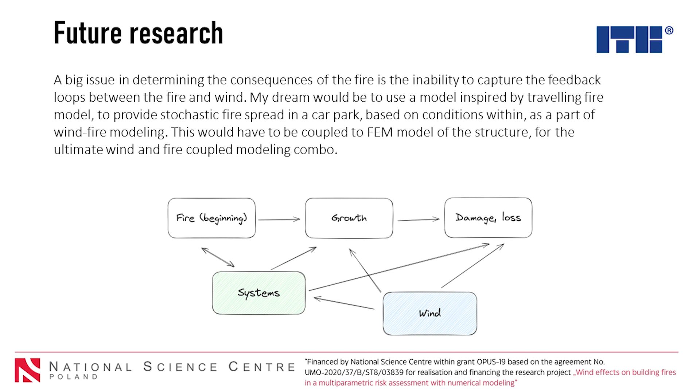And lastly, those analyses are costly. They're really costly and they take such a long time. Just building the mesh with the extrusion technique for this model of the city took like a month. And it was just a month of working on that. So we need to find some clever ways.

One is to reduce the number of scenarios that we are having, which was discussed to some extent today. The second one would be the use of GPUs, graphical processing units. It's something that we've invested in at ITB, and we already see it can accelerate the CFD process by 10 to 20-fold, allowing us to run significantly more CFD analysis than before, and actually do those kinds of analyses more cheaply.

And the third one, perhaps the most exciting one, is the use of AI, to predict, based on the velocity or pressure fields, the outcomes of fires inside of buildings. And if we could come up with such models, it could enter the general industry and be very helpful for many people.

So I am literally flooded by questions, so I guess I should stop talking and start answering. So let's try and do that. Thank you for this section, and let's try to tackle some of your questions.

First, Javor Panev asks: was changes of wind conditions, velocity, direction during the fire event being considered? Thoughts on how quickly the system will respond, recover? No. It's 300 simulations with a steady state, and you ask about changing them. It would be very time-consuming and challenging to introduce changes in ventilation pattern. There are interesting studies from the Fire Safety Research Institute on how changing the flow path in residential buildings has changed the outcomes for firefighters. There are some cases analyzed where life was lost because of the phenomenon you describe. Very interesting cases. I think if we got to AI, you could actually do that very easily, and it would be very interesting to see how quickly the system can respond to that.

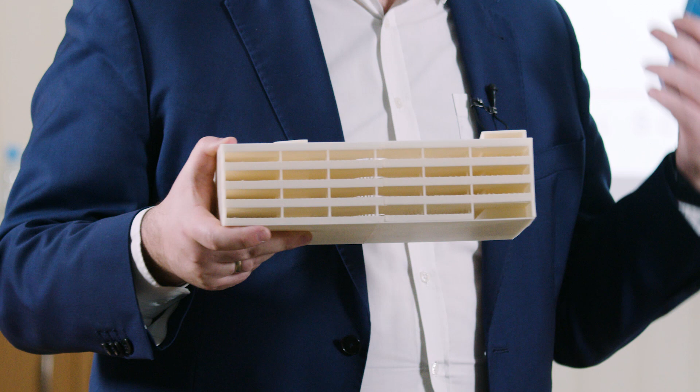There was a discussion that introducing a porous medium inside those openings would significantly change the flows inside the car park. We actually published research on that about 1.5 years ago, where a porous membrane reduced the flow inside the car park by half. In this case, I'm not sure if you want to reduce or improve the flow, so it's difficult to say. I'd say anything that goes into those openings, whether porous membranes, lamellas, whatever, will have a significant impact on the flows inside and should be modeled. If you're using detailed computational models, you should be capable of capturing those effects, and you should include them in your analysis. They can be significant.

What is the criteria for the area to be analyzed in the terrain? Yeah, it's a huge terrain. The reason is that when you have your highest building in your domain - now I'm going to my highest building, this bad boy - this one was 48 meters tall, and you need 15 heights of this building to the edge of your domain. That's what drives your domain size, and because we're rotating it, we want these 15 heights in every direction. This is what drove the insane size of the domain.

But the size of the domain isn't such a big issue because the mesh used in the far away parts of the domain is very coarse, like 5-10 meters. You don't need a very fine mesh besides the boundary layer. So it's not that expensive to make a huge domain, and it does make a difference in your CFD calculations. However, you must be aware how the ABL model can be impacted by the roughness of your ground, because as the wind flies through 2 kilometers of your domain, the interaction between wind and terrain will change the wind profile. This was the entire challenge that Paulina worked on, introducing her own enhanced wall functions for the terrain to make sure the profile we receive at the car park is the exact one we introduced into the domain. Okay, I hope they answered that one.